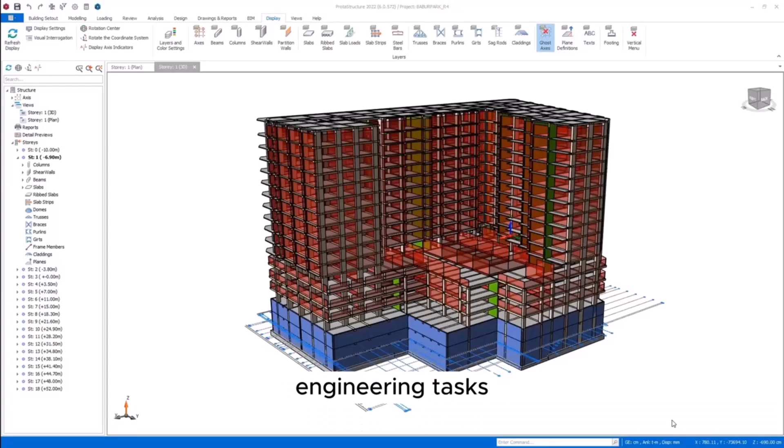Are you ready to discover Protastructure Suite? This comprehensive structural engineering software comes with 4 specialized modules, each crafted to efficiently optimize your engineering tasks. We are excited to introduce to you Protastructure. This innovative solution is designed to offer fast and accurate analysis and design for your building structures.

Imagine transforming the way you work with ProtaSteel, our groundbreaking tool for automated connection design and steel detailing. That's not all. ProtaDetail is a revolutionary structural drawing and detailing software, uniquely designed to automate the creation and organization of your structural concrete detail drawings. And all of this is achieved with just one click.

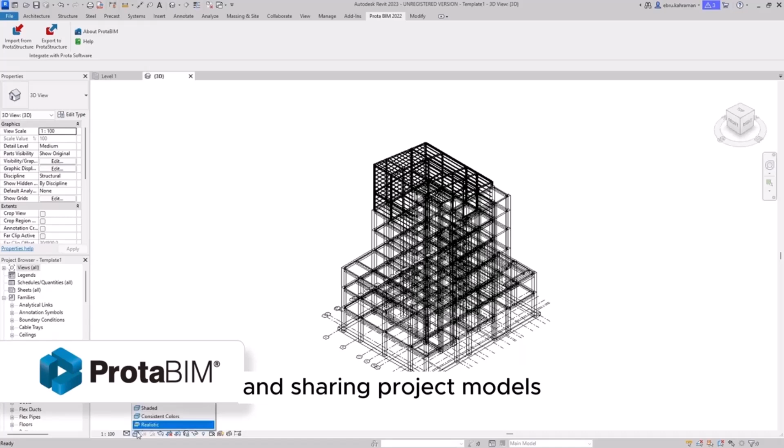And let's talk about collaboration. Our ProtaBIM feature is a game changer in coordinating and sharing project models. It's designed to enhance teamwork and ensure that everyone is on the same page. Minimizing project delivery time and increasing efficiency is central to our mission.

As a licensed user, you gain numerous benefits, including dedicated support from our Prota Knowledge Center. Our structural engineers are ready to assist you 24/7, ensuring you make the best use of the program.

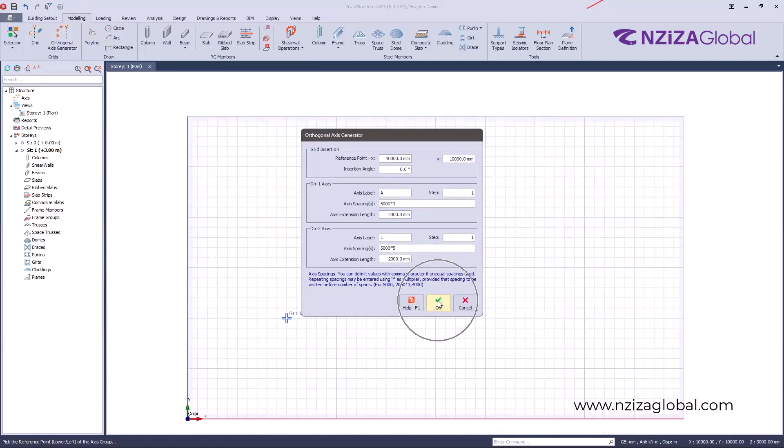We have also another way of generating grids automatically. Let's use like 5 here. If I click OK, now I will have a system of grids without creating grids one by one, which is a very fast way of doing things, thanks to Protastructure. After modeling grids, if you select a grid, you have different elements that can help you to modify a grid.

You can offset a grid. You can move a grid. You can see all these. You can stretch. It means you have a flexibility to model a grid as you wish. For instance, you can offset this grid. If I open the property, you have different methods that you can use to modify the grid.

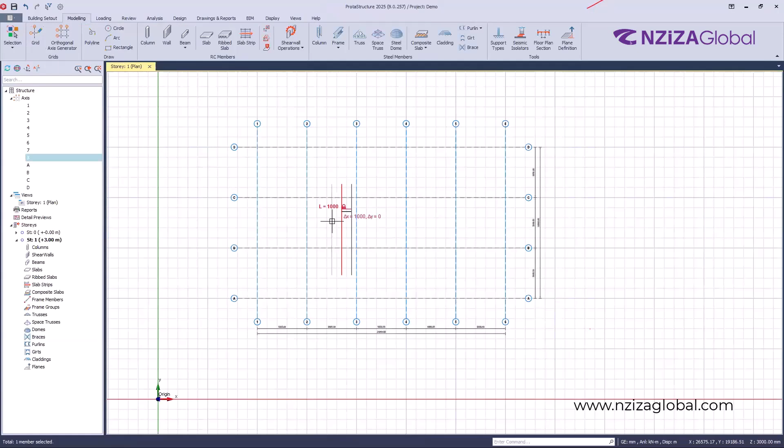You can, for instance, hide the bubbles. You can decide to hide the axis. So you see the difference, this axis is somehow hidden. You can stretch, for instance, like this. So you see that you have different flexibility in modifying grids. Let me offset another grid here. So you can offset grids as you wish.

Then let's move to the column. You can place columns in Protastructure. You have a property where you can define the sections of the column. If you are done, you can just drag and drop, then the column will be placed. As simple as that. Drag and drop, column will be placed. Everywhere you want, you can place columns in just a few seconds, like so.

So you can use this section manager, because by default I was creating a square column, but you have the flexibility to model all other different types of column. You can model a circular column, for instance. If I place, you see now I have a circular column. You can model even other types of column geometry. Protastructure gives you the flexibility to model different types, like this one. This is a cross shape. You can draw an L shape column and so on.

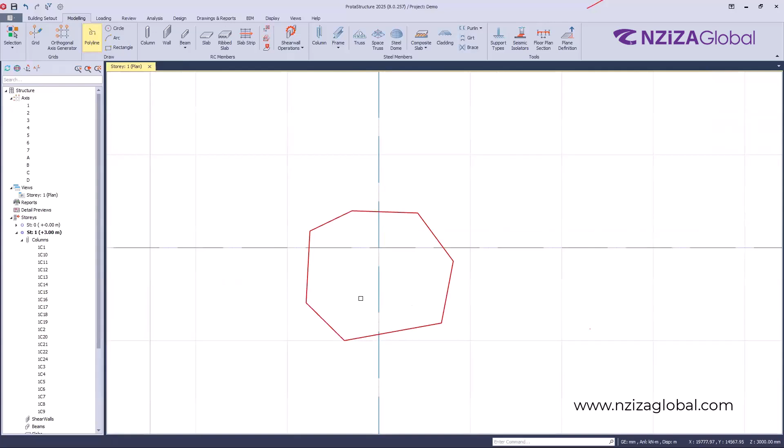You can also draw, for instance, any irregular shape. If I have something like this, you see it is an irregular shape, but if you want to create this as a column, it is also feasible in Protastructure. Select this and convert it into a column. If I place, now I have a column with an irregular shape. So when it comes to columns, you can place any kind of column as you wish in Protastructure.

So let's go to the wall, shear wall. If you have to place a shear wall, then you can use this command here. You can place a shear wall as you wish, for instance, like so. This is a wall. Between two intersections, you can place a wall as you wish, like this. Let's try to do the same here. If I click and try to offset this, I want to create another one here.

Okay, so instead of taking the wall from here, you can take a property of one of these walls, okay? And again, you can model walls as simple as that. So that's it. You can also, if you have already modeled a column, for instance, like this one, open the property again and do a modification.

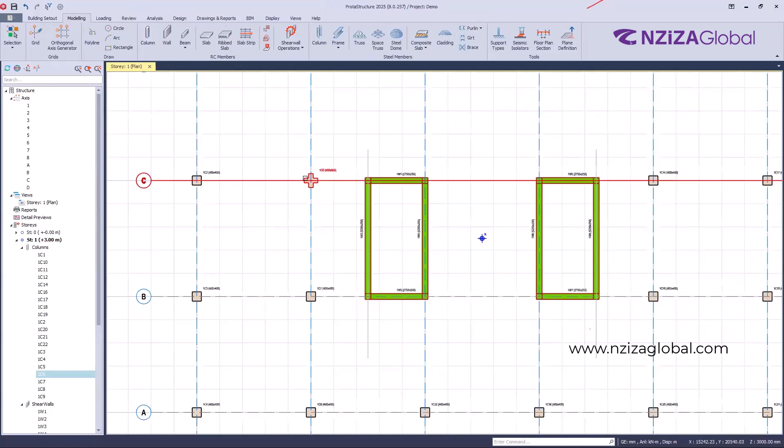Maybe change the section. If you click on update, you see now the columns which were square have been changed. You also have a flexible capability of matching properties. For instance, if I right click and go to match properties, I can select which property I want to match, click OK. Then I will select some of the columns like so. If you click on enter, they will directly take the properties from the selected one.

Okay, so you see how ProtaStructure gives flexibility when it comes to modeling either columns or walls.

So there is someone who is trying to write on the screen. Can you try to delete? Okay, thank you. So let's go on.

Let's see how we can model, let's say, a beam. It's a matter of taking the beam, then changing the sections of the beam as you wish.

So someone who is writing on the screen, can you please delete? Okay, so please don't write on the screen because it is somehow disturbing, okay? Thank you.

So it's a matter of filling in the size of the beam, and you can drag across and beams will be created as simple as that. You can create them one by one, span by span if you wish to, but this is the fastest way of modeling when it comes to beams. You can see what you have modeled so far.

You can also view what you are modeling in a 3D view. For instance, if I open the 3D view, you can see what we have modeled so far. You can see those columns which were changed. You can go back to the plan view if you wish to.

So let's continue modeling. Let's see a little bit on the slab. When it comes to slabs, ProtaStructure has the ability to model different kinds of slab. It may be a solid reinforced concrete slab, a ribbed slab, a waffle slab, or even a composite slab. ProtaStructure has the ability to model all those kinds of slabs. So for this case, let's go with the solid slab.

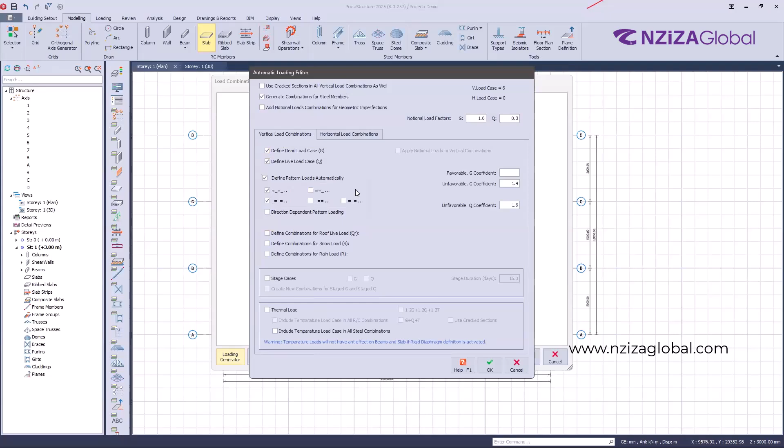To define this, we have stage cases, we have thermal cases. In horizontal, we have seismic, wind load, soil pressure, and so on. So it's up to you to define depending on what you want to use. I will select one of them. Then after selecting, the slab property will open. Then you can put the parameters that you wish: the type of slab that you want to use, the height, and so on.

And with a single click, all the slabs will be modeled. You can see in a 3D view what we have modeled, slabs as well. You can also model slabs one by one if you wish, but I'm showing you the quickest way of modeling.

You can decide to toggle so you can see the 3D view and the plan view at the same time, like this, if that's what you wish. You can reset again to have one view, depending on what you want to achieve.

When it comes to shear walls, you can also add openings in the shear walls. For instance, let's suppose that this shear wall must contain a door. If you select it, you have wall openings. Then you can add openings and define the measurements using these values here. Define the position of the openings as well as the size of the openings.

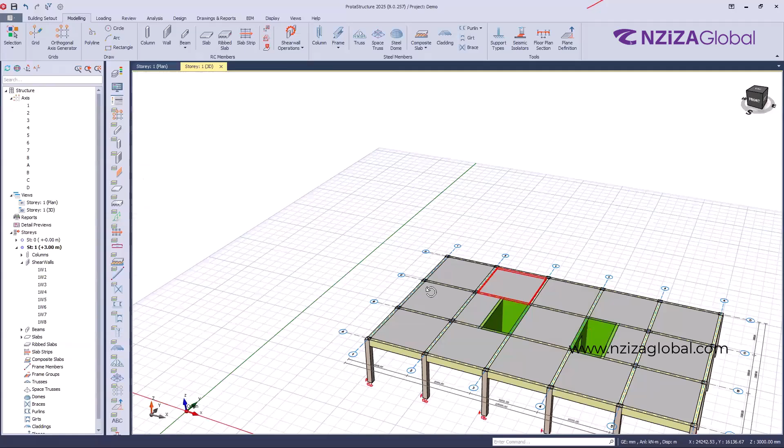And if I click on OK, you can see now how I have modeled an opening in a shear wall. Okay. So sometimes if you are working with a project, you see this slab is in my sight, I cannot see the shear wall. I can use these layers here and decide to turn off maybe the slab. They are not deleted, they are temporarily hidden. Okay. So because I want to work with this shear wall, I have temporarily hidden the slab. Okay. They are not deleted.

Then I will add another opening here, like so. Great. If I click OK, now you see you have openings. If you go to the plan view, here on the walls, you can see that I have 4 different walls. Okay, you have an option to select all of them and merge them to become one continuous wall. You can do the same as here. Merge vertical members. Now, if I select one of them, you see it is combined. Okay, so I will show the slab again. That's what we have modeled so far.

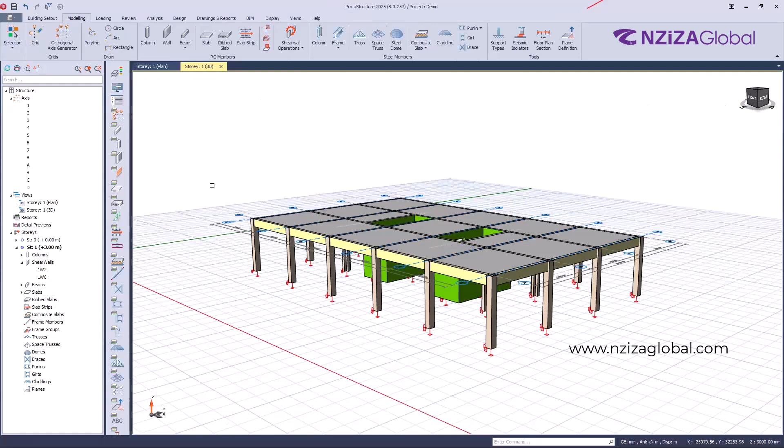You can decide to model slant beams, I mean slant columns, for instance. If I, for example, offset something like here, okay. If I model columns here, for the demonstration, I will tile my view so that you can see what I'm doing. See, we have those new columns here. I'm going to slant them. It's a matter of selecting, opening the properties. Using these tools, I can slant my columns.

You can see how the bottom side has been slanted. Okay. Repeat it on this side as well. Click on update. And then you see that you have also the capability to draw such kind of column. So you can see how ProtaStructure is flexible when it comes to modeling. Let me put also beams here. Okay, you can see that whatever I'm doing on the left side on the plan view, it is also being applied on the right side. Okay, so ProtaStructure gives you all these options.

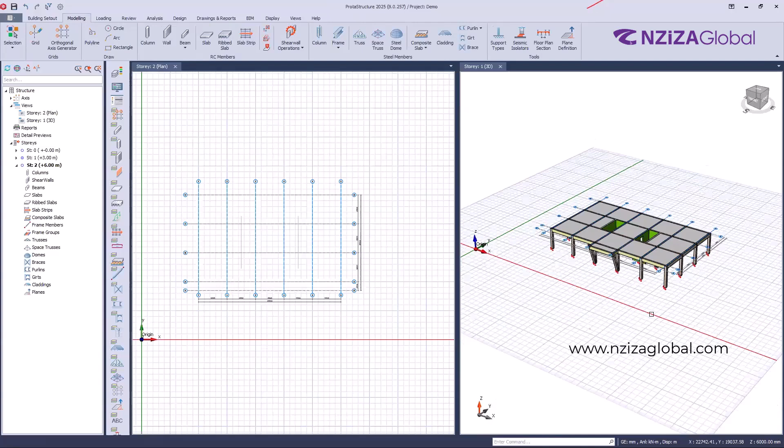Okay. So let's go and try to create another story, the upper story. So under stories, I can insert another story to make it 2. Click OK. Now on plan view, it is still empty because there are no members yet, in plan view or in 3D view, it is the same. So instead of starting modeling from scratch, you have an option that lets you copy elements from one story to another story. So I'm going to copy all the elements that we have modeled so far and paste them on the new story that we have created. To achieve that, I will use the generate stories command.

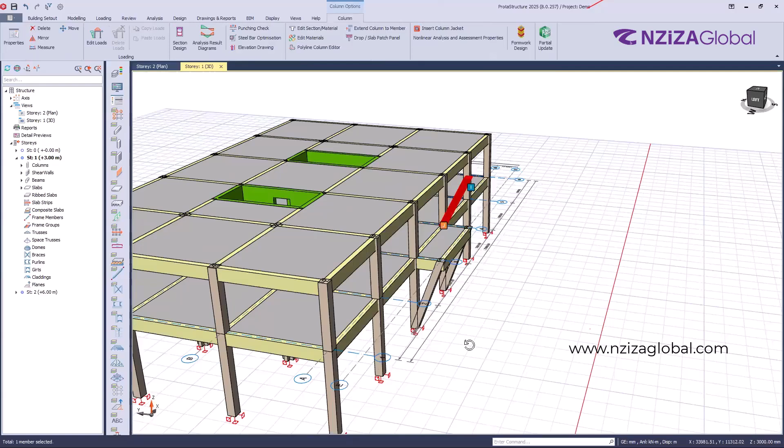Okay, you have to select where you want to copy elements from, where you want to paste them, and here you have the option to select which elements you want to copy and paste. Okay, so for my case, I will select all, then click OK. Take a look here in the 3D view. Now we have 2 stories which are similar. And even though you have copied elements from one story to another, you still have the flexibility to modify them. For instance, I can select some elements and delete them. If I delete them on the upper story, they will not be deleted on the lower story. So you still have the flexibility to do such modifications.

So in this floor, you have seen that you can model a solid slab like so. You can model also the flat slab. So let's try to model a flat slab on this. It means there will no longer be beams. So I'm going to select all the beams on the upper story and delete them. Instead of selecting beam by beam, there is always in ProtaStructure a faster way of doing things. So we have a filter command. I can use a filter, then decide that I want to select only beams. In this case, if I select everything like this, you can see that only beams are selected. Okay, then I can delete them.

Okay, now I'm sure that the beams have been deleted. So now I have flat slabs. Because we have flat slabs, we have to increase also the depth of the flat slab. Instead of doing it panel by panel, there is always a fast way of doing things. So if I right click, okay, let me do it maybe on a plan view, because you have the flexibility to do it in plan view or in 3D view.

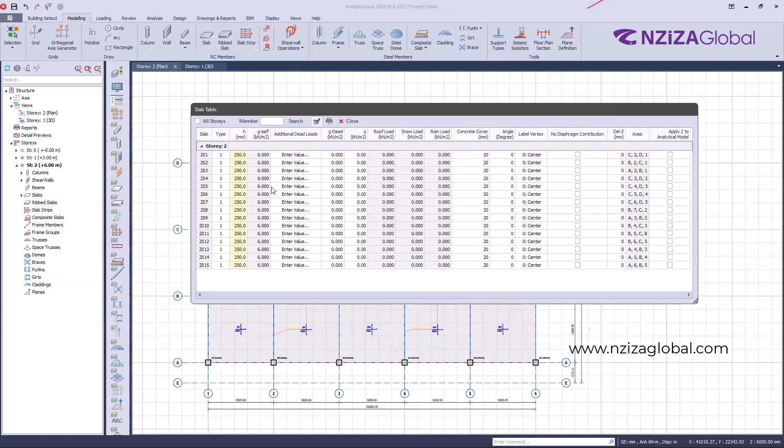If I right click, I have member table. I can go all the way to the slab table. In this case, I'm sure that I have a list of all the slabs in story 2. You can see by default we had 150, but I can select this and maybe put 250. We are working in millimeter. Take a look. If I click on OK, the 150 have been changed to 250. And then if I try to zoom, see all the slabs have been updated. Okay, so instead of modifying slabs one by one, you can do such a thing here.

Talking on slabs, you can also model a cantilever slab. As an example, under the types here, you have type 12. Type 12 is a cantilever slab. So if I select cantilever, I can define the length of cantilever, let's say 1.5. Then take one point and another one. You have to decide the orientation of the cantilever slab, upward direction. Now you see I have a cantilever slab here.

So if I do the same here, you see how the software is intelligent enough to connect automatically these two corners here. Let's do all the way around the building, creating cantilever slabs from here and here. You see that all the corners have been well joined. If I open the 3D view, you see you have a cantilever slab all around the building.

Okay, so because we are modeling this flat slab, we have to define the drop for the columns. So I can do it on plan view, using the filter command again. This time I will be selecting columns. So select all the columns. Now you see only columns have been selected. If I right click, then I will have a drop slab patch panel. So I'm going to add some drop to the columns.

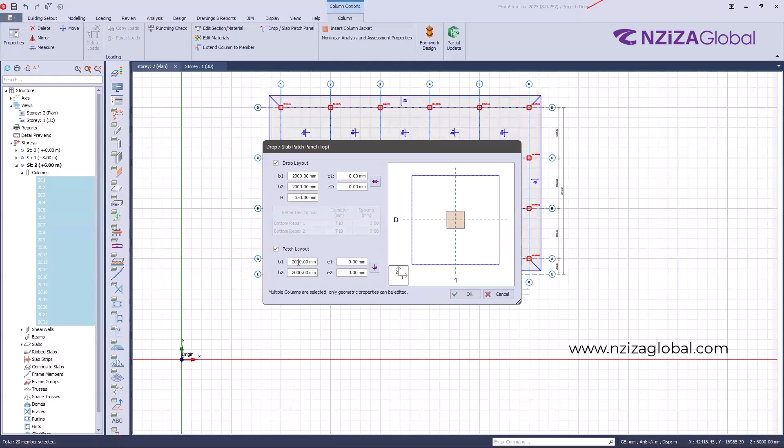Just put the values here, patch layout as well, as you wish, depending on the result that you want to achieve. Okay, so if I click on OK, you see all the columns now have the drop panel. If I go in a 3D view, that's how it is looking. Okay, so we have modeled the flat slab as well.

So let's try to go to the upper story. I will create another story. That story now will be 3. I have created another empty story. So you are already familiar with generating. We are going to generate members again to the third story. Let me bring the one from story 1 to story 3. Then I will copy only shear walls and columns, and beams. Click OK. Then we have copied the bottom side. I will delete these slant members. I don't need them for now.

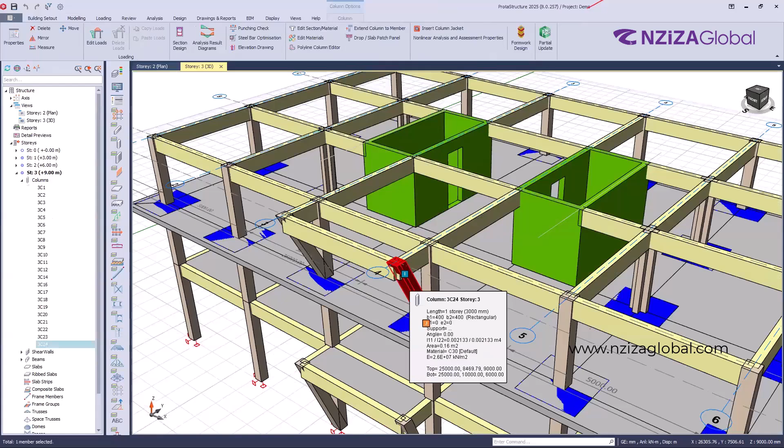So on this part, what I want to model are other types of slabs that are supported by ProtaStructure. Ribbed slab, you can model ribbed slab as well. So that's what we are going to do. Open the ribbed slab here. Under the ribbed slab, you have to define the size of the ribbed beams. For instance, here, let's say 375. You can make it hollow or block, depending on what you want to achieve. So if I come and place, now you see I have a ribbed slab. Let me do it all the way here. If I go to the 3D view, now you have modeled ribbed slabs.

So let's try to model also the waffle slab, because they are also supported. Under type, it's a matter of changing and going to grid. Waffle slab is referred to as grid in ProtaStructure. So then I will again model the slabs. If I go to the 3D view, you see I have also modeled the waffle slab.

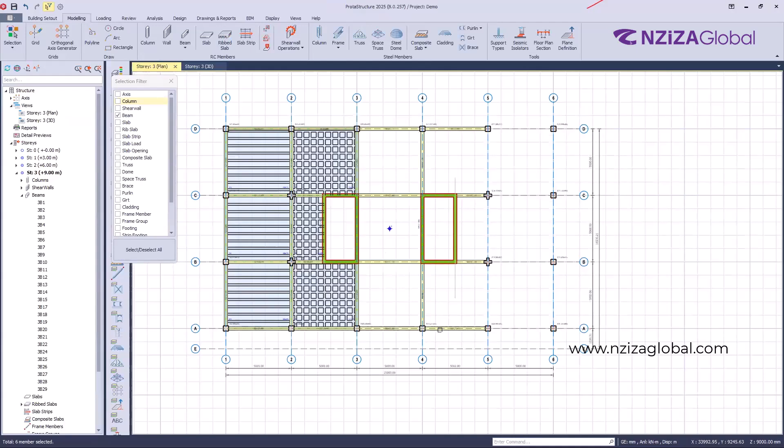You can also model the composite slab. Let's try it on this side. So I'm going to select all the beams here. These ones, delete, and then let's delete all these beams. I'm deleting these beams because these beams were concrete beams, and I want to create a composite slab.

So I will need to create steel framing. Under the steel part, under the frame, you can model the primary composite beam. It's a matter of coming here. Under the property, you can select. We have different property sections, depending on what you want to achieve. So you can select one of them.

Click OK. Okay, then you have to model. I'm going to just model the beams all the way here. Those are the primary ones. Okay, like so. You can go and model the secondary ones under the frame also. You see, you have secondary composite beam.

However, I will not use this command because if I use this one, I will be needing to model one by one, which is time consuming. Remember, in ProtaStructure, you have always the easiest way of doing things. So I'm going to use the frame. So it's a matter of coming, select a given property here, the section. Okay. Now under this property, I have to define the quantities.

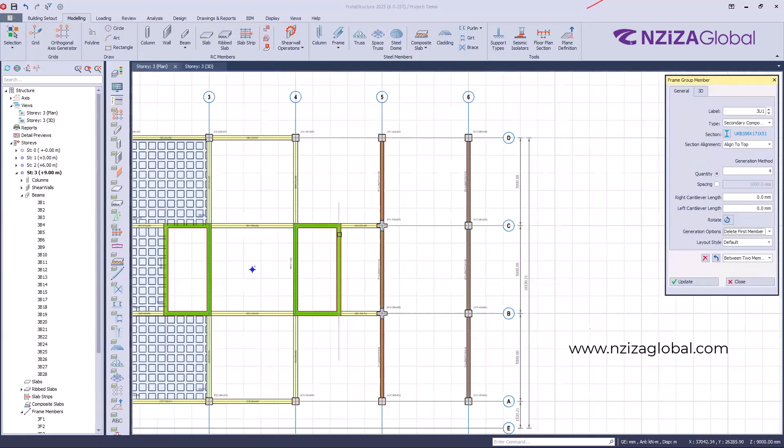Let me use like 4. And then under generation option, I will delete the first member. Okay. So if I come select the first one, select the second one, the secondary member will be automatically modeled. I can do the same here. Then on the last part here, I don't want to delete the first member here, so I will have to change and use normal one. If I click these two, then they will be placed.

Okay. So the remaining part, if I open in the 3D view for you to see what we have modeled, I have modeled the primary beams, the secondary ones. Then we have to model the concrete slab. Okay. We have to put the composite slab here. Okay. You have 2 options. You can use one that you wish. I will use this first one. I will model slab all the way here. Then the property will open.

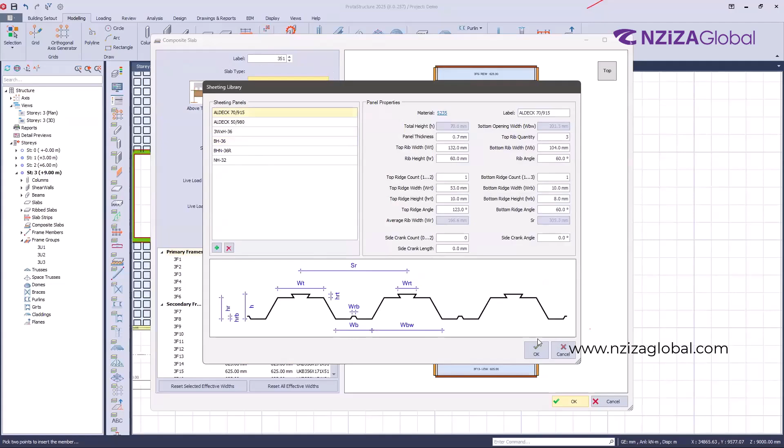So you have to deal with these properties to change the slab here. Do you want the slab to be above the flange? You can see on the figure here, the slab is above, or you want it to be level to the primary beams. It's up to you. You can always come here under the deck. You can change the sheeting deck, the type of the sheeting that you want to use. Okay. You can also change the thickness.

You can apply some loads, either the live load, you can apply the dead loads, okay, as you wish. If everything is okay, if you click on OK, now we'll have a composite one, like so, okay. So we have covered all the slab types. So let's go to the upper part and try to create a roofing. So I will also create another story up, empty story, like so.

So I will again generate members. So I will go to generate members from this story all the way up. I will only copy, let's say, columns. Click OK. Close. Okay. So we have copied all the columns. We want to model some roof. Okay. So let me delete this.

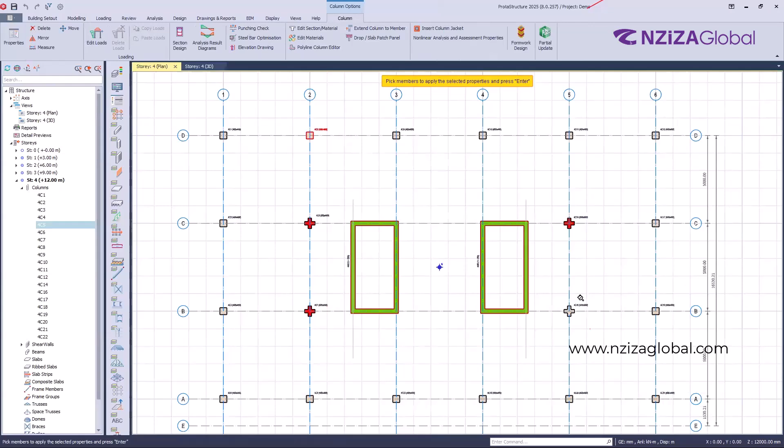Do it on plan view so that it will be much clearer. Again, I will use the match property. Remember the match property that I have used before. I want all these columns to be squares. If I click enter, they will have the same property. Let me delete these columns here. Good. Okay, so what I'm going to do, I'm going to try to elevate, because you have also a possibility to elevate a given column.

Okay, so I will select all these columns here, rotate and select all these columns. See, they are all selected. If I go to the properties, okay, then you can use this delta Z to add an offset. So I want to add an offset at the top side. Let's say 2000, for instance. If I click OK on the top side, close, you see now these columns have been elongated. Okay, they don't have the same height as before.

So let's try to model the truss, for instance. Here under truss, we have a truss. If I select truss, it's a matter of selecting the starting point, the ending point. I will have a truss dialog box. You can choose from the different truss types and the patterns that you wish. You can use these parameters here to change the geometry of this truss.

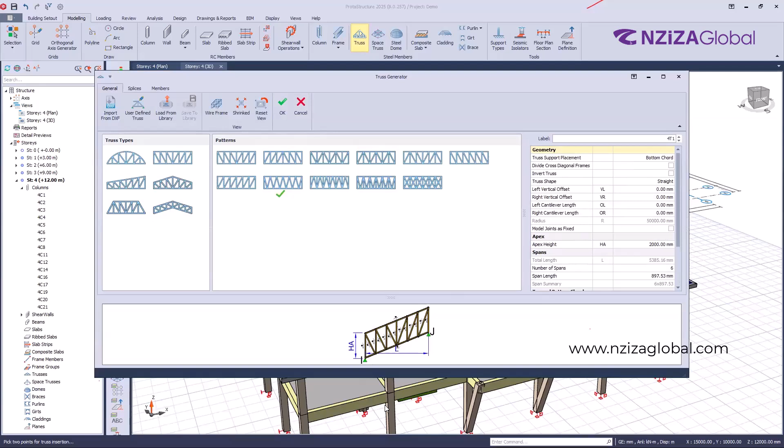Okay. For instance, you see that the supports are on the bottom chord. Okay. You can maybe say you wanted them to be on the top chord, like so. See that it has changed. You can use all these parameters to change your truss. You can apply splices if you wish. You can go to the member type where I want to define the sections of the member.

So if everything is okay, if I click on OK, now you can see how my truss has been modeled. It is somehow a little bit weird. So I will go back to the property. Then you put 1 meter here instead of 2 meters to be much more realistic. Good. So you can copy even a truss from one end to another. So if I select copy, you can copy from this node, for instance, all the way to the remaining nodes. See how they have.

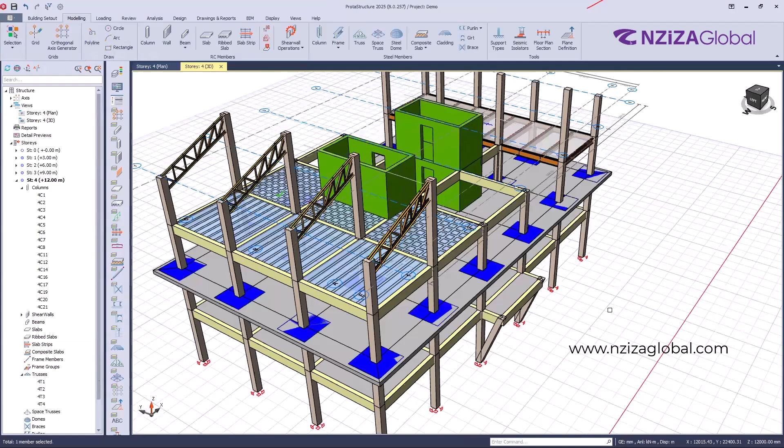Can do the same here. See, I have modeled the left side. If I want to model the right side, I no longer need to go back to the settings. As long as I take the command, click OK, the software remembers the latest option that I had, so I can continue placing. Okay. So place, copy from here all the way here. Okay.

So you can see, it's up to you. You can model in the plan view, you can model in the 3D view. All are acceptable. So let me try to put some other steel members, like for instance, purlins.

Okay, if I select one truss and another one, then I will have a dialog box where I can again use these properties to set these purlins. Do you want to use the sag rods? You can use this to make changes, or you can click none to remove the sag rods. Click OK, then purlins will be placed. Okay, I can do the same here. Click OK, purlins will be placed.

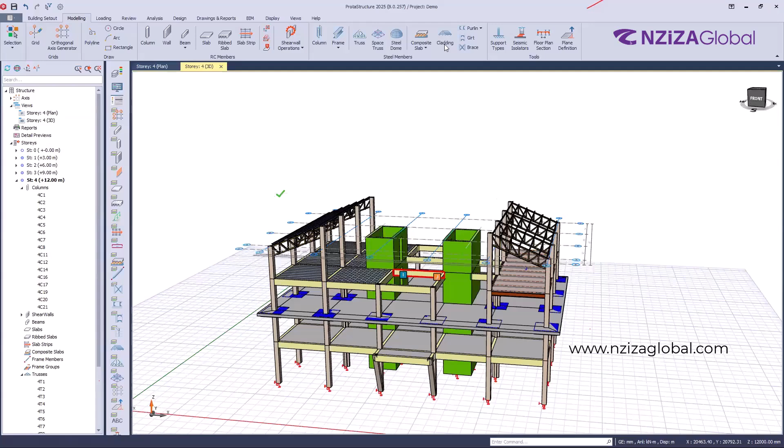Good. So you can also even add cladding. For instance, if you select cladding, select the purlins, cladding will be automatically created for you. You see now I have claddings. You can even apply the loads on claddings. Okay, if you go under loads, you have also flexibility to add loads. Okay. On the left side, let's also add the cladding here.

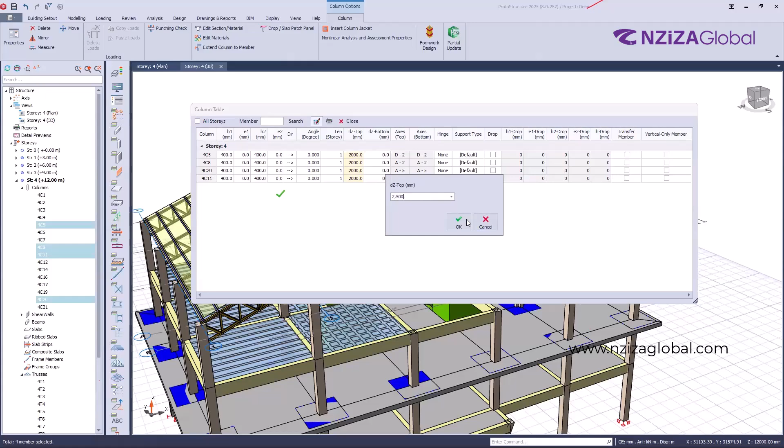Then that's good. So for the middle part, let's try to do something very interesting. It's a new feature in ProtaStructure 2025, the space truss. Let's try to use it. For that, I will try to elevate again these 4 columns. Let me try to select. Go to properties. Under delta Z, I will increase again by 500. Okay. Yes, you see they are a little bit longer. I want my space truss to sit on those columns.

So let me do it on plan view. It will be much easier for me. So I'm going to create a space truss. It's a very new feature in this software. So select truss, then select where I want to put my space truss, then it will be automatically generated. Okay, so it will be up to me to do some modification depending on the shape I want to achieve.

For instance, let me use this one. If I click on generate, you see how it has been generated. It's a matter of changing this top surface, the bottom surface. You can use this icon here to change the sections of your truss. You can go under loading where you can apply some loading. You have self-weight, live load, and so on. Okay, like so.

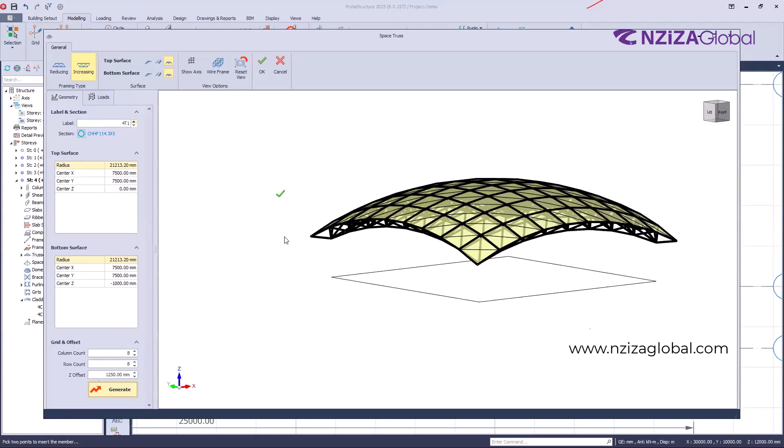Under geometry, because I have raised the columns, let me try to put some offset here. Yes, it will be much better. If I click on OK, just wait a bit to load, then to create the space truss. If I go to the 3D view, you see how my space truss has been created. Okay, so you see what you have modeled in just a few minutes. So you have a lot of tools here that you can use. You have a very flexible way of modeling any kind of shape depending on the building that you have.

Okay. So after modeling, let's see about loading. You can do the loading part. You can customize some walls, masonry walls that you want to use in your project. You can apply different materials. Is it bricks? Is it plaster? Is it tiles that you want to add? Okay. If the material you want is not listed, you can also add it using edit material. You can add the material that you want.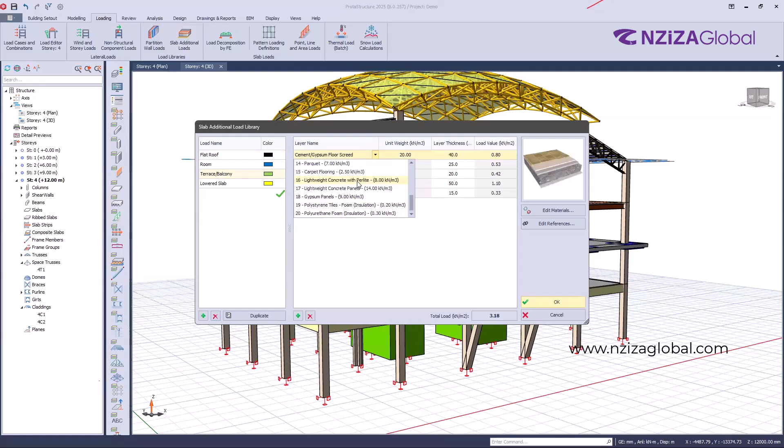You can do the same for the slab. If you have additional dead loads that you want to add on the slab, do you want to add gypsum on the slab? Do you have a cement grout? Is it tiles and so on? So if you don't have the material here, you can always come here and create your own depending on the project. So after creating this, the remaining part is to assign the material.

Let's suppose this beam here. If I go to story 1, this beam here is supporting a masonry wall. I can select it, go to edit, then I can add a masonry wall. I will have to define which wall, okay? I will have to define the height and so on. If I click here, click OK.

Now we see the red color here that I have. It is indicating that there is a masonry wall sitting on the beam. If I go to the plan view, you see now the beam has become red because it means it has a masonry wall. The good thing about Prota is that it is a very user-friendly software.

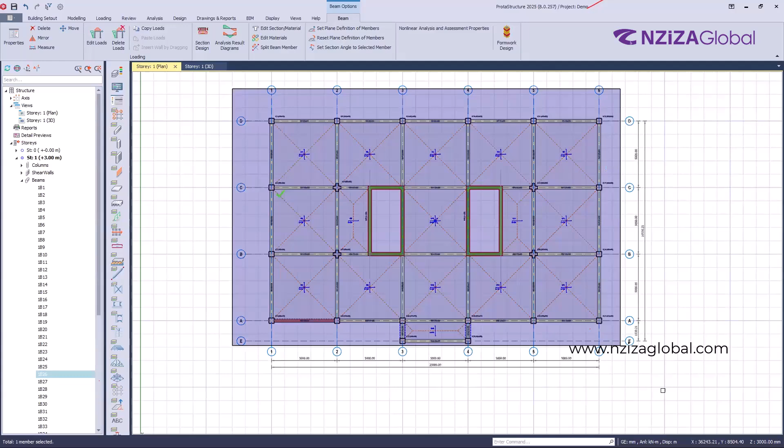So let's suppose all the beams have the same wall. Instead of assigning beam by beam, you can just simply click on copy. You can copy these loads, and then you can select all the beams. Use Ctrl V on your keyboard to paste. And now if I go in the 3D view, you see all the beams have those masonry walls.

Okay. If I go back to that masonry, there is an option to add openings. If you want to add, maybe there are some windows, or even some windows and doors, for instance. You have the flexibility to add those openings as you wish. Click OK, update, then OK. Now you see that the masonry wall also has openings.

You can do the same for the slab. If the slab has, let's say, a masonry wall, you can also go to the edit load. So you see all these kinds of loading. You can add a point, you can add a uniform, you can add an area, and so on. So they are also feasible.

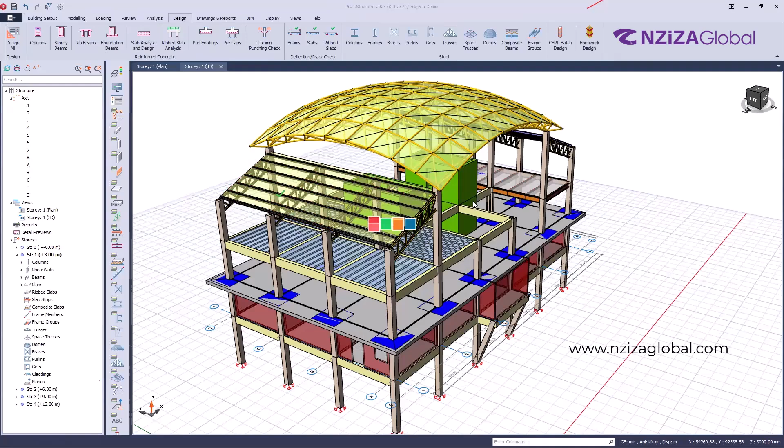So after loading your structure, the next step would be to do the analysis and design. Because of the short time that we have for the demo, I will open a new project which has been analyzed and designed. It is the same project, but which has been analyzed and also designed. You can see it is similar to the one that we have modeled, but we have analyzed it.

You can see members are green, so it means if you see on the legend, they are okay, they are passing. So all members have been analyzed and designed. Even the trusses, you can see all are green here. It means they are passing, they are okay.

Going to the analysis, you always have the analytical model. Suppose I have clicked on the analysis part, we have analyzed. You can always come under the analytical model, where you can investigate the loadings, the shear, the forces acting on the structure. Then you go to the design, where you can design columns. For instance, if I open the columns here, all the columns have been designed. For demonstration, if I open one of these, you see it has been designed.

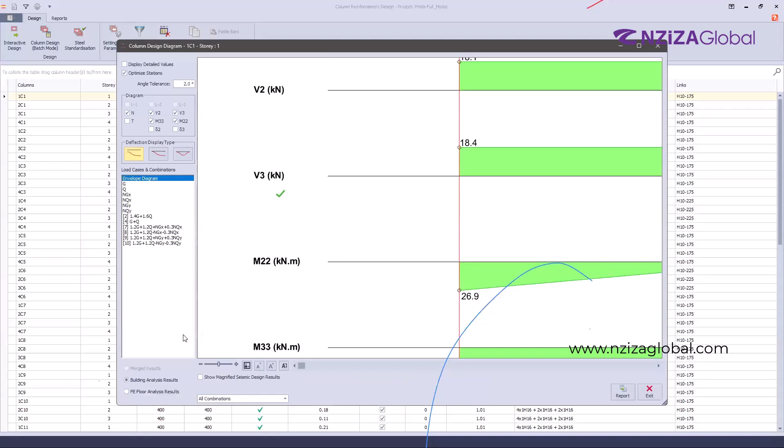We have all the load combinations that we have applied. We have the reinforcement here. You can open the diagrams if you wish to view. You can see all the results. You can create a report for this column if that's what you wish by clicking on this. You see you have a report. You can save it as a PDF or Microsoft Word.

It's up to you. You can even view the drawing, how it will look after detailing. You see we have all the reinforcement in the columns. We have all the sections all the way up. That's how all the slabs have been designed. We also have the shear wall, remember we had the shear wall. If I click on rebar layout, you see the details of how the reinforcement has been added. Again, you can create a report and so on as you wish.

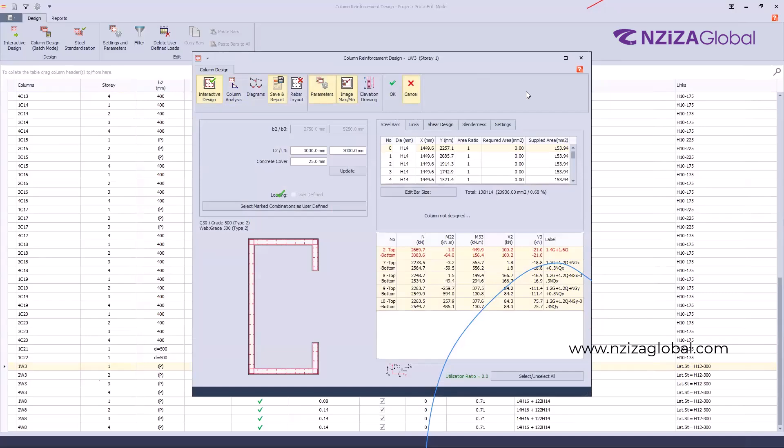You can also design the beams, the story beams. If I open one of the beams, for instance, for you to have a view, they have been designed here. You can see the detailed drawings as well for the beams. I have a beam, we have the section here, and so on.

We haven't designed the foundation yet, but we have slab analysis and design. Those are the analysis and design of the slab. You can also create the report if you wish. We have designed the ribbed slab. Remember the ribbed slab we had here. So you have to define the ribbed slab. Click on design.

Wait, there are no members here. We have footings. We haven't created footings so far. So let's go to the footing. Before going to the footing, let's look at the steel part, because we also have trusses.

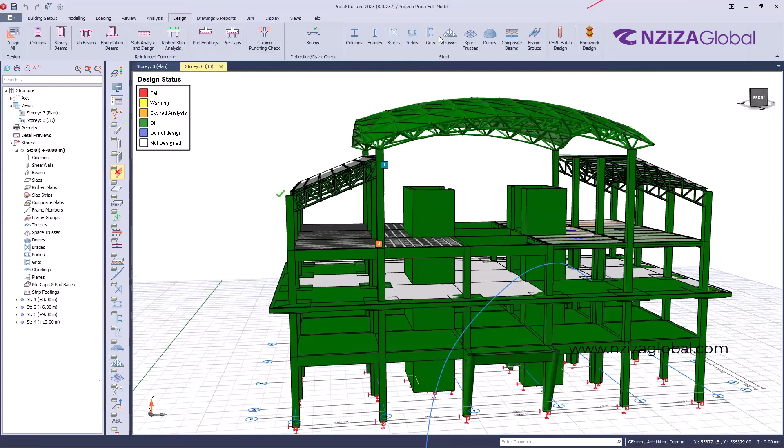So if you click, for instance, on truss design, everything is passing because they have been designed, but you can double click to investigate more. You see the truss that we have created, all the information is here. If you want to redesign, you can use this, you can change the section, you can create a report, and so on, as we have seen.

Even for the space truss, the new one that we have created. Okay, so you can design the part here. So the last thing here I want to show you on the design part, you can design the formwork in ProtaStructure. Okay, ProtaStructure can perform formwork design.

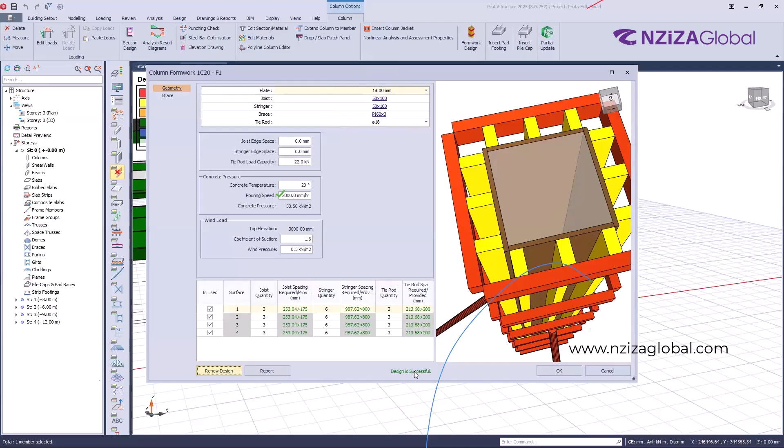If I select a column, see, I can design the formwork. Under the geometry, you can define the spaces here. Okay, if I click on renew the design, now you can see the design is successful. You can do it for the columns, you can do it for the beam, you can do it for the slab as well. You can design all these formworks, okay, good.

So let's move to the foundation part. So if I go to story 0, select any given column, I can insert a pad footing, I can insert piles depending on what I want to achieve. Okay, if I insert a pad footing, as it has been designed here, I can use these features to adjust if that's what I want to achieve. I can see different parameters here, the soil parameters that I'm using, and so on.

You can go to the rebars where you can change. If I click on a 3D view, you can see the reinforcement that they have created. Okay. Do you want to use the top bars? If, for instance, I remove these kinds of bars, see, it is being updated. If everything is okay, you can generate a report. You see, again, you can save it as PDF or Microsoft Word. If I click on OK, now the pad footing will be created.

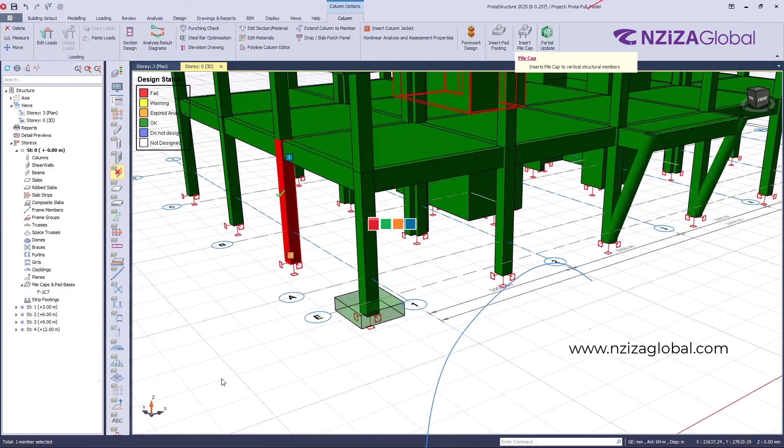So you can also create piles. Again, under the pile cap, you can use all this information to adjust the piles. If everything is okay, the design is successful here. If the rebars are okay here, you can again click on OK, then the pile will be created. Okay, you can also design the mat foundation.

For instance, for this area here, I'm trying to model a, let's suppose here, this will be the perimeter of the slab. Can put the slab, let's say it will be 300, for instance, 400, any value, change to be closed. So if I create a slab here at the bottom, okay, so I can also design this mat foundation.

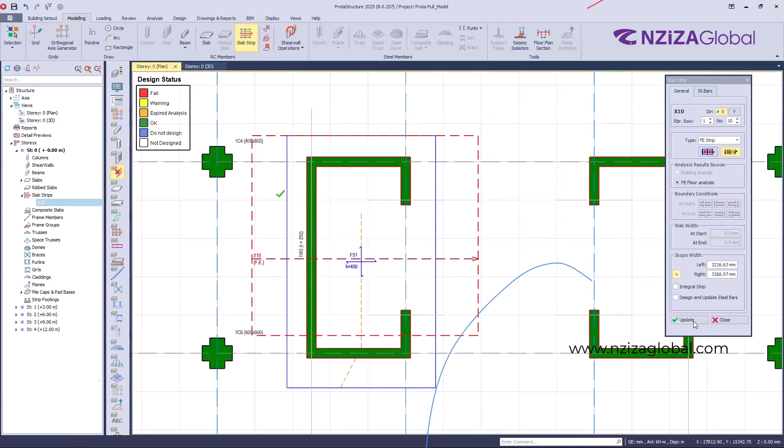I will be using the strip again, and the strip, I will use the slab strip, finite element. Then you have to define the strip, okay? Click OK, the strip will be defined. You have to do the intervals. As long as I update, you see the boundaries are being updated and so on. So update. You can create even the one in the Y direction. Again, update. Update this boundary as well, and so on.

Okay. So after creating this boundary strip, you can do the strip design, but it is asking me to do the reanalysis. So I will not go through analyzing again, but that will be the way of designing a mat foundation. Okay, so that's it about the design. So if you have designed everything, then it will be time for the reporting and drawings.

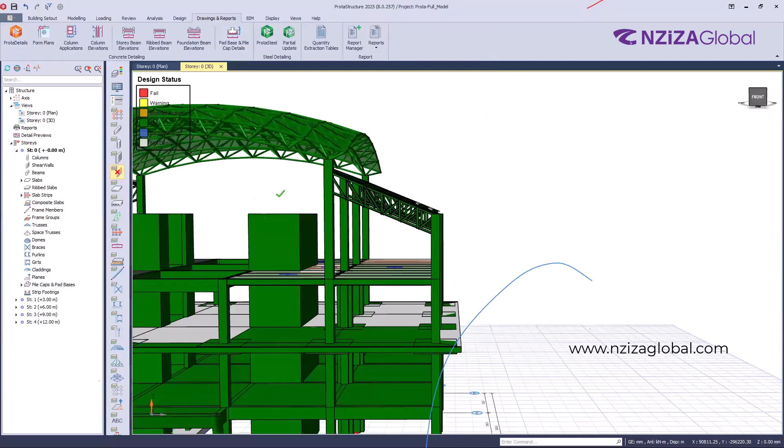You will be using ProtaDetails to produce details of the reinforced concrete. We'll be using ProtaSteel to define the connections of the steel as well as the detailing of the steel. Before we go there, there are two important reports that ProtaStructure provides. After doing all this work as structural engineers, the next work will be doing quantities while producing the BOQs. So imagine doing the quantification of all this building. It will be time consuming.

But in ProtaStructure, we have very unique features that will let you know all the quantities of your project when it comes to concrete and formworks. So if I go to quantity extraction, I can extract all the concrete that I have. If I click on calculate, I will have a table showing all the quantities in cubic meters of the concrete. Okay, you can see the foundation part, and you have different stories.

Now you see here at the top we have the total quantity. You can click on report to have all the details. Column 1, for instance, having this diameter, section, area, length, then it will give you the volume. Then it will do the summation. It will give you all the quantities for columns, for beams, any reinforced concrete member that you have.

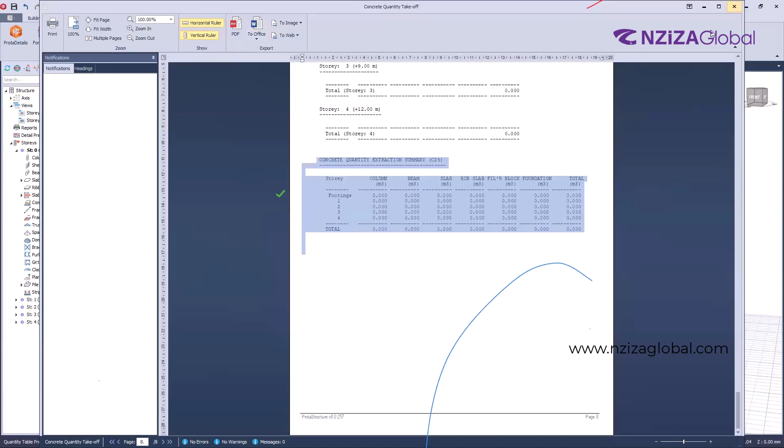Then here at the bottom, we will have a table showing all the quantities. So again, we can save it as a PDF or Word. You can also extract the quantity for the formwork. Very, very useful. Again, if I click on report to have a detailed report, you will have formwork quantity takeoff for all your project, and you can save it again. That's very, very useful, thanks to ProtaStructure.

So let's go to the launch of ProtaDetails so that we can see how we can create detailings. Maybe before I go to ProtaDetails, there is a question from Amsaru. Sorry if I pronounce it wrong. He said 3 questions. One, can we assign surcharge and pressures on retaining walls as triangular distribution? I think that is in ProtaDetails. No, even here it is also available.

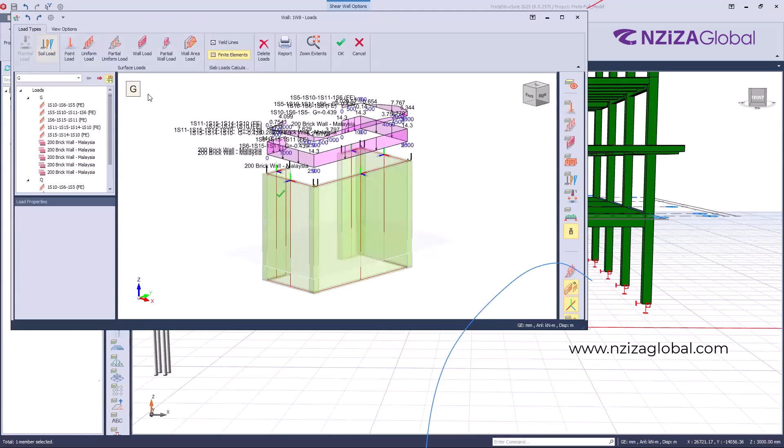For instance, if I go to this shear wall, suppose it is supporting a wall. If I go to edit load, then we have wall area load here. So if you apply this wall area load, it will be applied to the surface of the shear wall. You can see even here on the graph, it is a triangular load. There is also another way. I will not click on OK because it will invalidate my analysis, but that's how we can achieve it. Even in ProtaDetails, we'll see how you can do that.

So when it is soil applying laterally to the shear wall, it's a matter of going to edit load. Then you have this wall area load. Any other question? His second question was, how is structural system classification considered? How is? Can you come again? How is structural system classification considered?

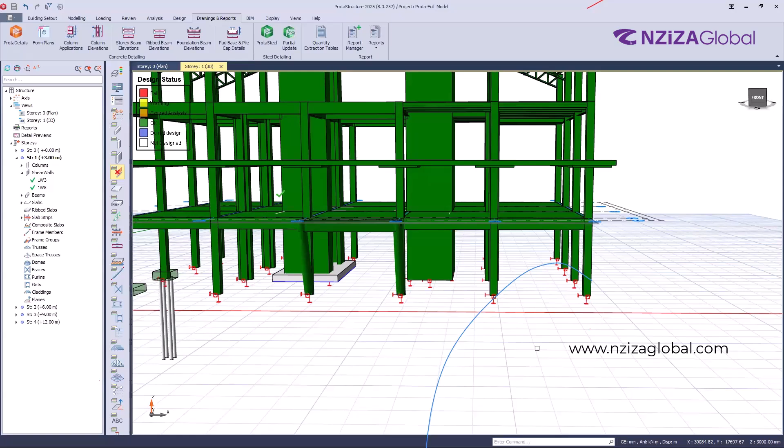I'm not getting the question very well. Maybe he will give more information. Yeah, he can unmute and provide the clarification of what exactly he needed to ask. Okay. Amsaru, are you there? He is not around, maybe? No, he is. He is even unmuted. Can you speak loudly, please? We can't hear you. Maybe you can use typing in the chat box, because we can't hear your voice.

His third question was, how can we go through building system category? Building system category is considered when you are dealing with earthquake analysis under the building analysis here. You see, if I go to the settings under the earthquake, mine was deactivated. That's why we didn't see it. But if you open one of these, click OK, you'll have seismic parameters. Depending on the code that you have selected, you will have different categories of building. Let me double check the one I have selected first. Eurocode.

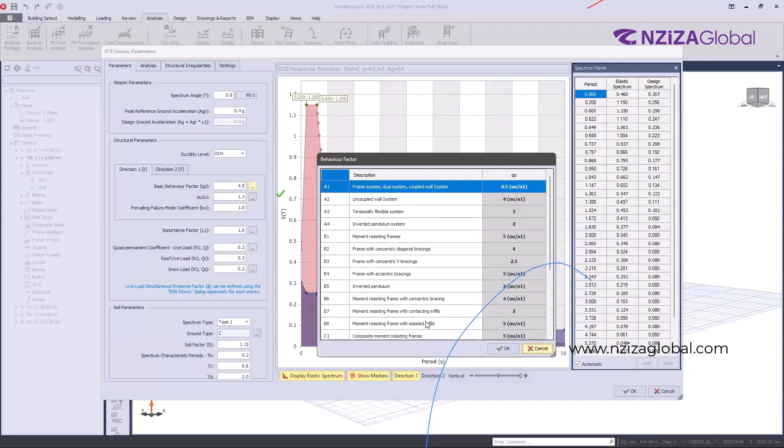So under the settings here, you can see the ductility level. You have medium, low, and so on. You have all these features. If you click on the behavior, you'll see different categories of buildings: multi-story, beam systems, steel frame, depending on the type of the building. Then you assign them here under the properties. If you click on OK, they will be applied. Then later on, you go to the analysis and run the analysis.

So I will not click on OK because it will invalidate my analysis. So I'm going to go back the way it was, but that's where you can set all those kinds of categories for the buildings. I hope he's answered. This question is the same as Mama's, and I think both of them are answered. The chat box is still open. Tadeste asked how ProtaStructure exports to ArchiCAD software. It's just to save a file which is opened by ArchiCAD. We'll go on that later. We can proceed to ProtaDetails.

Okay, so the one who is writing on the screen, can you delete the one that you have drawn?

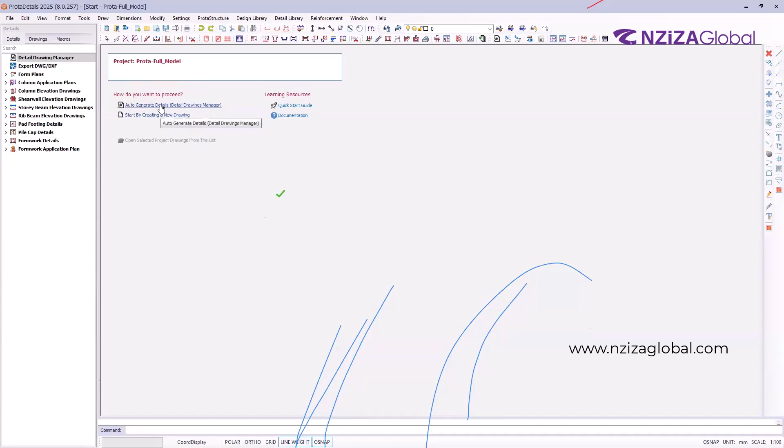So proceeding to ProtaDetails, it is under drawing and reports, under ProtaDetails. For my case, I have launched ProtaDetails. I have opened it in the background. That's how it opens. So there are two ways of generating drawings. You can start by creating a new drawing, which means creating an empty drawing. Then you as a designer choose which element you want to detail. So that's one. There is another, auto-generate detail. That's the one I'm going to use. It means the software will automatically generate all the details for you.

There's a couple of settings that you have to go through here first. I will not go through all of this. I will just click on draw. If I click here, then you will have to wait. The software is generating all the drawings for your project, meaning the columns, all the beams and so on. You see in the background here, some of the drawings have started to be drawn. It will take time depending on the size of the project and also the capacity of your computer. So it is generating beams.

Let's wait a bit, still loading. Okay. So here in ProtaDetails, it is a CAD platform, if I can say. You will be able to automatically generate all the drawings from ProtaStructure, from the project that you have designed. But we have also other design tools which you can use here in

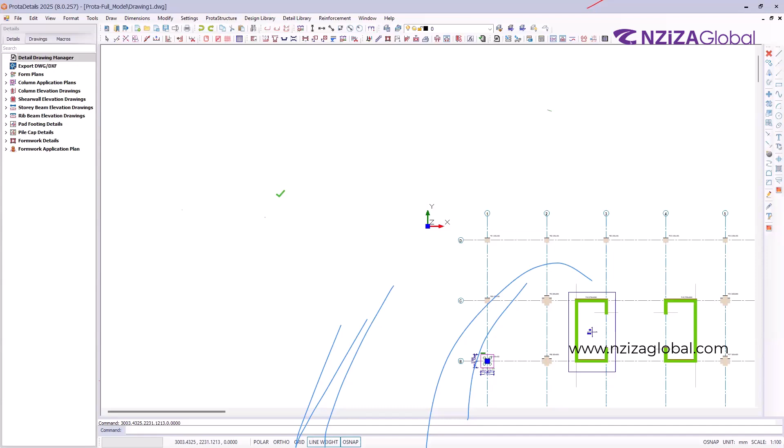Yeah, I'm opening the detailing. It is still loading, so it is taking a bit of time because of the space trusses that we have created, I think. So, okay, it is done. So let's go on. You can see I have a bunch of drawings here. There are many drawings. That's why it took a little bit of time.

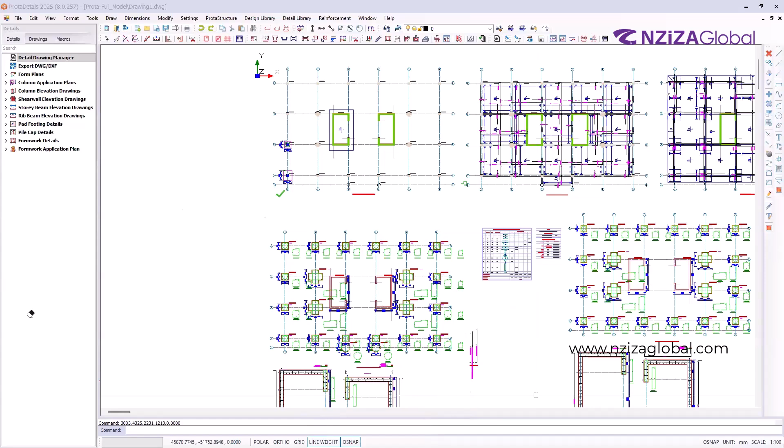If I try to zoom here, this is a foundation level. We have only the foundation, remember the pile cap that we created. So let me try first to delete all these drawings. Okay, so I will stop sharing for a bit. Let me see if I can delete. No. Okay, good. So I was deleting those elements. So let's proceed.

So I was explaining this is supposed to be a foundation level. So we have only the pile cap that we created and the pad footing. You see they even have dimensions. We have the first story. Remember we had a solid slab with reinforcement. You can see we have reinforcement in both directions. We have another one where we had a flat slab. We have also reinforcements along the strip. We have the one for the ribbed slab and composite slab.

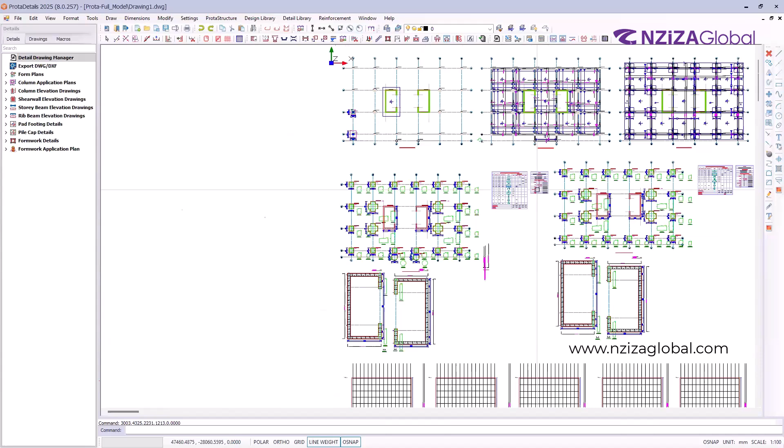Then we have the column application, where it is showing all the columns with reinforcement on the grids. We have a column application quantity takeoff. This is a very great feature of ProtaDetails. As long as it has created all the drawings here, it creates also a quantity takeoff in tabular form, with the reinforcement size, the quantity, the length, and even the schedule. So it will be very useful when it comes to quantity takeoff, even on the site for the steel bender. He will have an overview of how it is.

We have those shear walls with all the reinforcement you can see. Remember we created an opening. Good. We have the column elevations. See all the details for the column elevations. These are those columns that were slanted, the circular ones. We have beams here, all the way down with the sections, reinforcements, and so on.

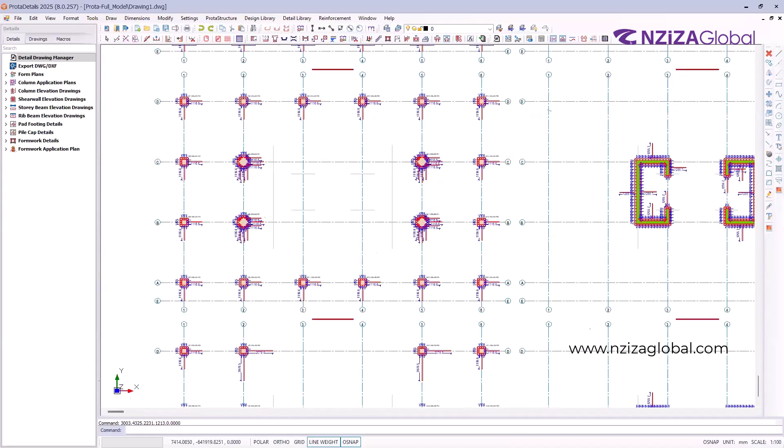We have the formwork. You remember we designed the formwork for some columns. You have the formwork as well as the table for quantity. All these in red are the formworks for all the members that we have created. There are a lot. That's it. You see how the software has created all the drawings here with a single click. So this is the easiest way.

A good thing here is that these are not just lines like in other detailing software. These drawings are interactive. For instance, if I select, let's say, this column, I can right click and create quantities only for this column that I have selected. Now you see I have a quantity table for only the column that I have selected. So all these are not just lines with different colors, they are interactive.

So if I select this line, it is not a line, it is a rebar, it is a reinforcement. I have a property table. I can modify any properties here. For instance, you see it is diameter 16. Under the quantity table, we had also 16 diameter. So under the property, I'm going to change from 16 to 20. I'm putting a diameter of 20.

So if I put 20 here, it is going slow because we have a lot of drawings. But what I want to mention is, as long as you change this number here, the 20, it will be applicable in the quantity table as well as on the other drawings.

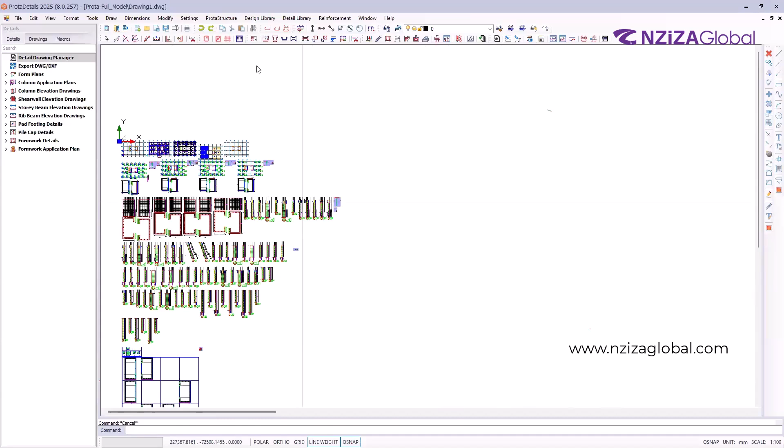So you can put all of this on a sheet, because under the properties, you see we have insert to sheet. So you can put it on the sheet where you even have a title block and so on. For instance, if I open one of the sheets here, you see this is a sheet with the title block here. So you can put all these on a sheet if that's what you wish.

It is also feasible. Then talking about other design libraries, you can design the cantilever retaining wall, a stairwell, a retrofitting, a swimming pool, and so on. So that's it when it comes to ProtaDetails, because I see the time is running. So we conclude here.

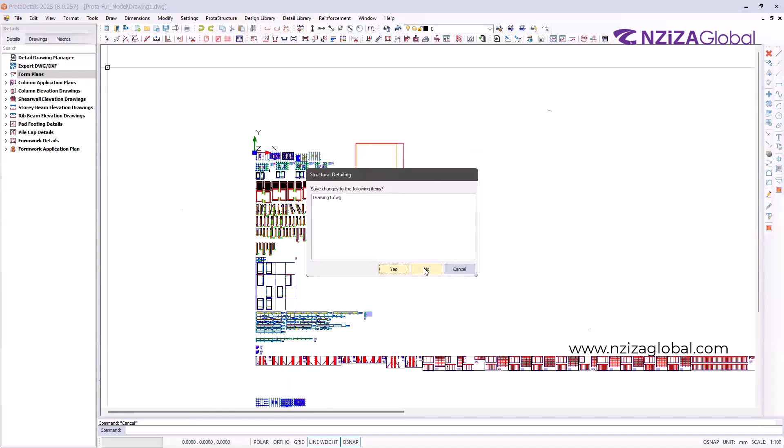But before I conclude, let me try to open a given project, any project that has been done in ProtaDetails, so that you can see the end result if you have done the adjustments. So this is a sample of one of the projects that I'm taking randomly. So you can see we have a sheet.

I think I can end here because the time is running. So maybe I will answer the remaining questions if Alexander helps, then we will conclude the demonstration. Yes. Thank you very much for handling that.

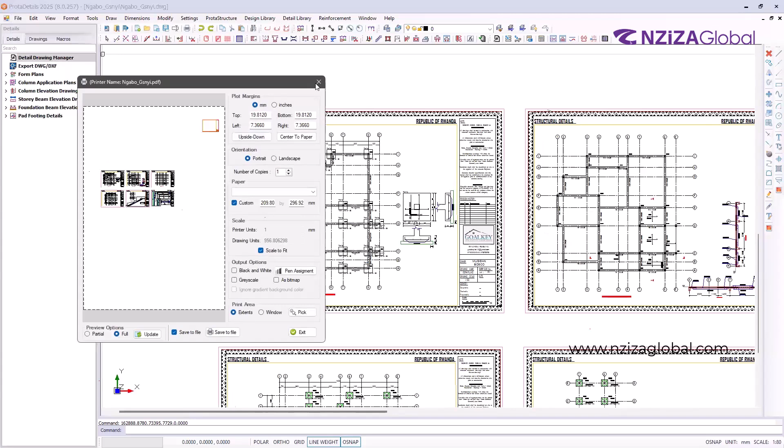For instance, these have been exported. You can see these are the PDF documents. This is a PDF document of those drawings that we were seeing. This is a PDF that has been exported. It is the same as this one. So that's about exporting drawings to PDF.

But here you can also create reports. Because when we were in ProtaStructure, the details we saw were individual. We had the column report, we had a beam report and so on. So here you can combine all those reports to make one PDF. It is done under this report manager, where you see all the different reports that we have. You can combine them as one. Then if you click on view, you can save them as PDF or as a Word document. So that's about exporting to PDF.

When it comes to the physical model like this, you can export it to ArchiCAD, Revit, or any other software. For instance, this is a Revit software that I have now. It's not ProtaStructure. If I open an empty file, you see that we have a ProtaBIM button here at the top. If I open this, you can import from ProtaStructure or export to ProtaStructure.

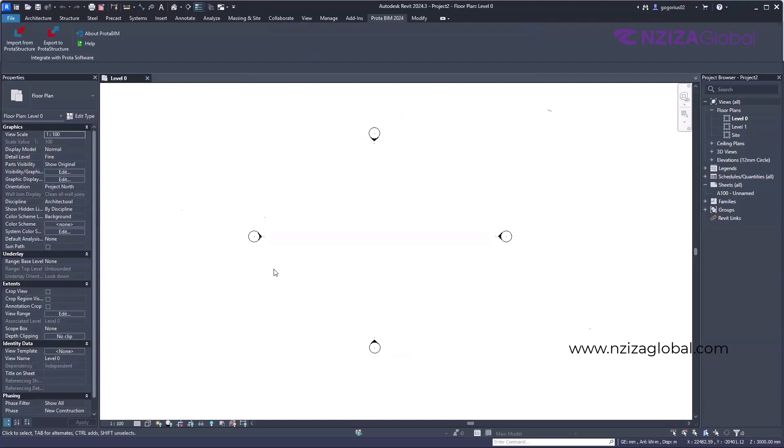Another way, you can just use the IFC. So for instance, if I go back to Protastructure here, under the BIM tab, you can export as IFC. So if you export as IFC, you'll be able to open this project. So after exporting, for instance, if I go to export, I'm exporting this. You see where it has been exported. Then you can open your other software, maybe Revit or other software.

It's a matter of knowing where the file is located, this one. If I click on open, it will load. It will load, then they will be uploaded. So let me re-export this again. Export full IFC. In the meantime, I can even open this. Okay, so go back to Revit.

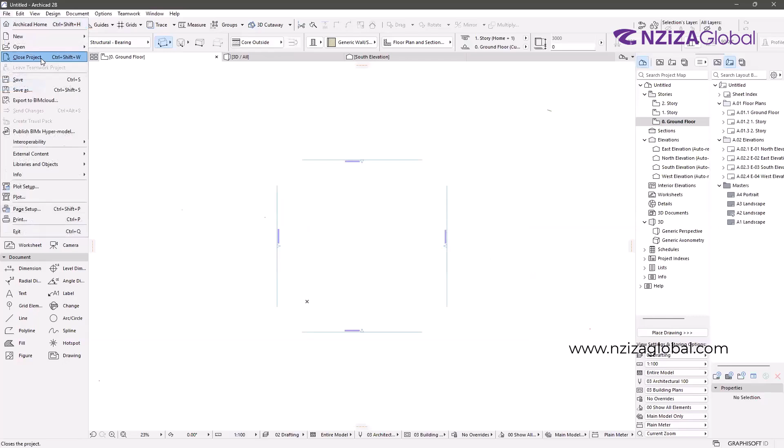So let me change the folder to be sure, let me put it on, let's say, desktop, for instance. Demo, save, export. So demo IFC. Then I will go to ArchiCAD. Then file, open. Then I will search desktop, find where the file is. So I will change the format to IFC. Then I will see the file, then open. Okay, so it will take time to load.

So when it comes to ArchiCAD, you can export from. There are some errors here. I don't know why. So let's wait a bit. When it comes to ArchiCAD, it's a matter of using the IFC file only. They are telling me there are some errors. I don't know why. But when it comes to Revit, you can see we have this ProtaBIM, where we have the import from Protastructure and the export to Protastructure.

Because you see, I'm in Revit, but if I use one of these commands, you see this dialog box which is appearing here is the one we are using in Protastructure. Because when we are opening a new project in Protastructure, this box that we have, with project code and whatever, is almost similar to the one we have here, where you have to create a project. So you see they are automatically connected because it is Revit, but for ArchiCAD, it is somehow different.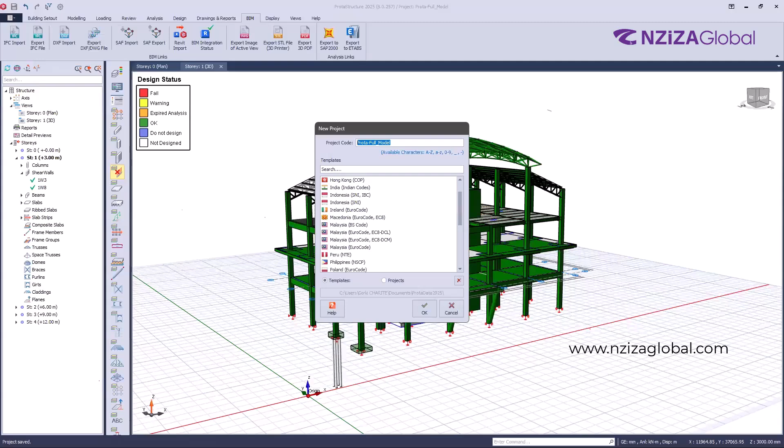You can see here I'm on Revit. You have a Revit family and Protastructure family. Okay, so you have to map Revit family and Protastructure family. Okay, but it is taking too much time. So maybe there are some errors. I don't know why. Can we start by answering other questions, Alexander, while I'm trying to figure out the problem of this ArchiCAD file?

Okay, Taodros asked, is the toolbar the same with other softwares? If not, what makes this different from others? You mean the toolbars of what? Of Protastructure or of ProtaDetails? Can he unmute and clarify? Hello, everyone. I'm Charite Gorki from Ethiopia. I want to ask about the toolbar of Protastructure and other softwares like Revit and AutoCAD. What makes it different? Is that the same or not? So the toolbars you are mentioning, is it related to these tabs here? You mean the tabs and the toolbars here compared with those from Revit? Yes, of course. And the modify toolbar we use in AutoCAD and Revit and so on.

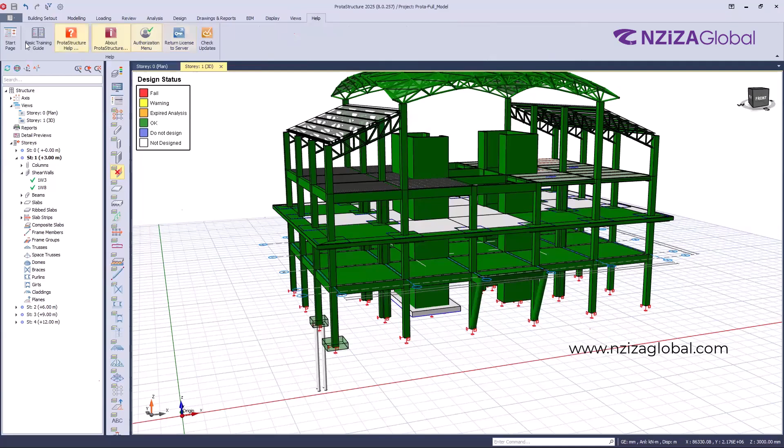And you remember when we were on the start page, I mentioned that here we have some links. These are resources. For instance, if you click on one of them, let's say get started, it will open a browser and then it will load, see, and then it will direct you to the Protasoftware website where you will have some references of the project and the software as a whole. Okay, so that's how I can answer your question.

Additionally, what I can add is that every software is unique in its way. You just have to see what benefits you. In Protastructure, coming straight to toolbar, tools, you might find a column here, and in another software you will find a column, but there are additional benefits for the tools in each software separately.

For example, you were asking about AutoCAD. AutoCAD is just a detailing tool. It's exactly like ProtaDetails, even though ProtaDetails is specifically designed for structural detailing, and it is automated compared to AutoCAD using another software, because AutoCAD has no structural software inbuilt, which is different here because ProtaDetails is directly connected to Protastructure.

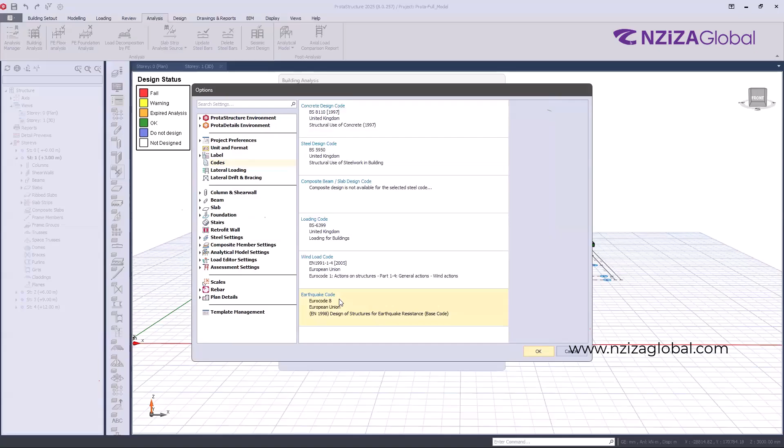For instance, before running the analysis, there are some settings that you have to go through. For instance, when you activate the wind load and the earthquake code, let's use the Eurocode, the one you said you are familiar with. If you activate these, you see now here I have seismic parameters, which I will use to specify the parameters of the seismic, and I have wind load where we go through defining the wind parameters.

So under the seismic parameters I have mentioned, depending on the project you are dealing with, you have to set all this information. All this information, depending on the type of the soil, the structure parameters that you have, the seismic parameters that you have, will be needed in analyzing those parameters you are saying. Okay, so that's first.

When you go to the modeling options here, you see where you have to specify the degrees of freedom of your structure, where you were talking about whether it performs the torsion. So you have to specify all of these settings before going to the analysis. Is your project torsion permitted? Is it permitted in X and Y only, and torsion prevented? All of this, you have to define before going to the analysis.

After defining all this, when it comes to seismic, because ProtaStructure is very, very powerful in seismic design, you also have to define some stiffness of your sections before going to the analysis. If the stiffness is defined, the degrees of freedom have been defined, all the seismic parameters have been defined, and we have other settings related to the slabs and whatever, that's when we move to the analysis part. Under the analysis part, the software will analyze all those parameters: the torsion, the loading distribution, the sway and whatever.

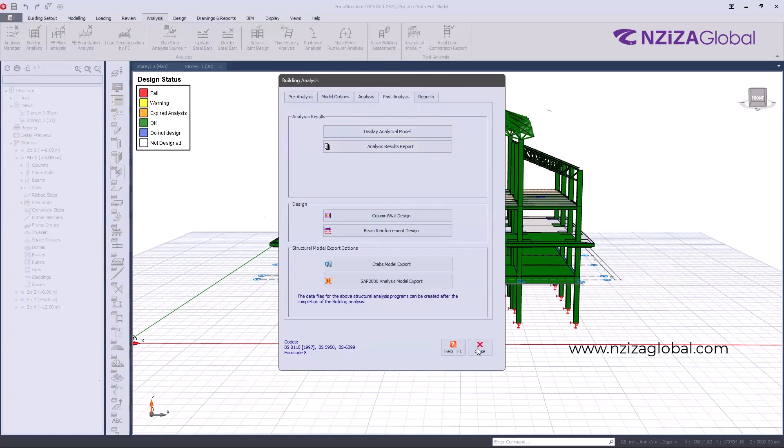So let me try to open a report to see if it is available. And let me double check to see if it is the post analysis. I'm going to try. Okay, let me see. So you see on this report, the post analysis report, it gives you all the reports related to those you were asking about.

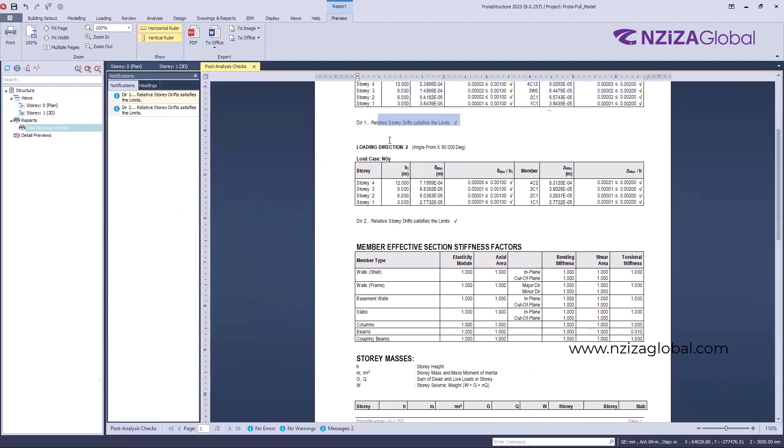Do we have to check the story drift? It will give you all the information here, the height of the story and whatever. It will perform some checks, and then it will give you the conclusion. So they don't have a drift here. It will do all these calculations, the story masses, depending on your project, the earthquake dynamic inertia forces, you see, all are here. So in short, ProtaStructure does all those checks that you have mentioned. The only reason you didn't see them is because we skipped the analysis part.

So when you join one of our trainings, we will have all the full information related to the analysis part, and we will cover all those parameters. So that's how it is.

Okay, thank you. You're welcome. Amsaru, are you answered? Yes, I got the answers from the engineers. I got the answers. Yes.

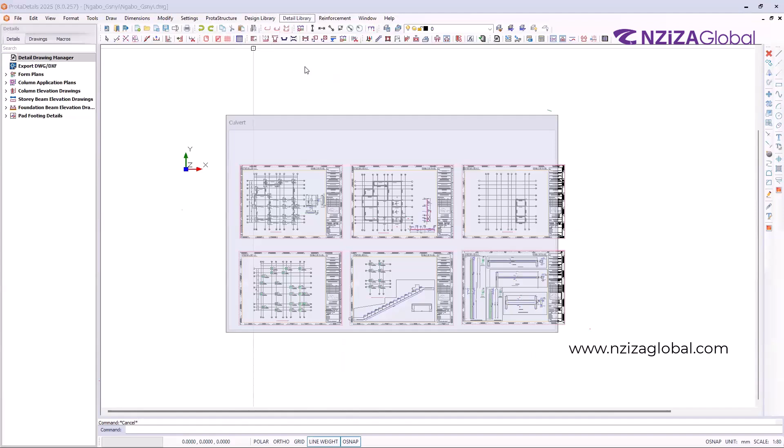It only details culverts. When you go to the ProtaDetail modules, we have a design library and a detail library. Under the design library, you will be able to see all the elements that ProtaDetail can design. But under the detail library is where the culvert is located. It only gives you detailing. So it means you have already designed it.

You only want the details, instead of going to detailing software and starting drawing manually. You can come here and fill in all these parameters, then the software will give you the details. So these are the details, but not the design. That's how it is. Excellent.

Would you mind giving me a chance for questions? Abadi, which question do you have? Would you like to unmute and ask? Maybe. I have something. Yes, your voice loudly, please.

Okay, thank you. How can we transfer towards the pads, and how can we select first the loads to design or to analyze? We should have to transfer first toward these pads. So how can we transfer the loads from roof toward the pads?

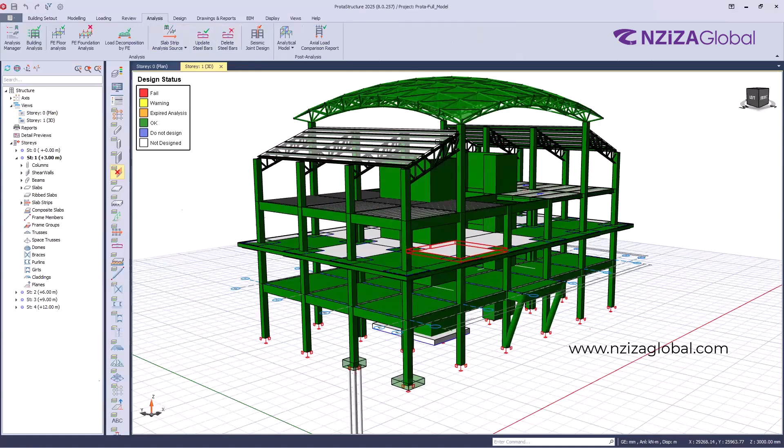Thank you for your question. You are asking how to transfer loads from the superstructure all the way down. So all of that is under the analysis part, because when we are analyzing, the loads are being transferred from the top going down. But you can also use this load decomposition by finite elements. It will decompose all the loads all the way going down.

And again, if you open the building analysis after setting all the settings that I have mentioned so far, and click on building analysis, all the loads will be transferred from the top going down. When reaching the pad foundation, you have to design the pad after doing the analysis, because after doing the analysis, that's when the loads have been transferred.

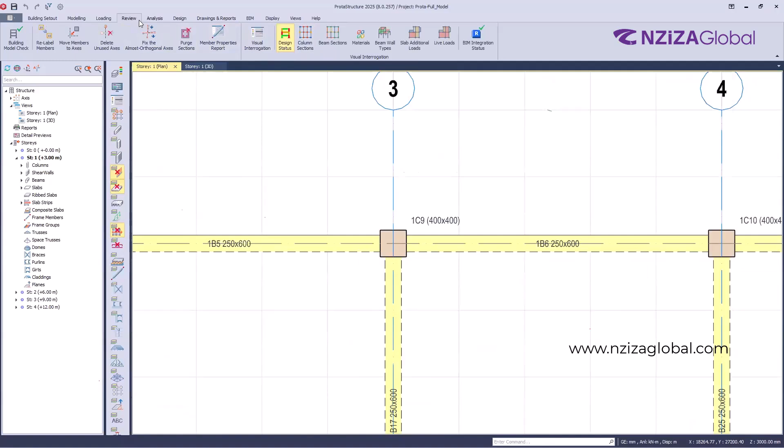So if I open a plan view, let me remove this color legend so that it will be easier. Let me hide the slab. I'm hiding some of these layers, so I have only columns. If you go to the Review tab, under Visual Interrogation, you see the column display. Open it and you can activate one of the load types, let's say actual load.

You can define a load combination. Let's use one of these and click OK. Now these are the total loads reaching this column. In the upper part I had 100 and something; in the lower part I have 300 and something. So the loads have been lowered all the way down. This is achieved only after doing the analysis.

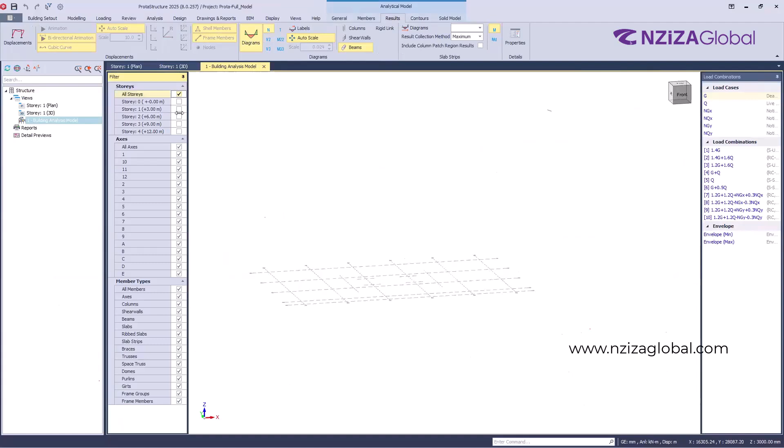Another thing, if I open the analytical model here, it will give you an overview. This is the analytical model of our building. Under this analytical model, let's activate the diagram so that you can see the diagrams. I will show only some of the stories. Now I have activated only story one so that you don't have too much information.

Here we have different loads depending on which load combination you want to access. If we click on one of these, I have activated the diagram. Let's start with the member. If I activate the frame, you see how the load has been distributed from the slab to the beam. You can even open the label to see how they have been transferred in kilonewton per meter on the beam.

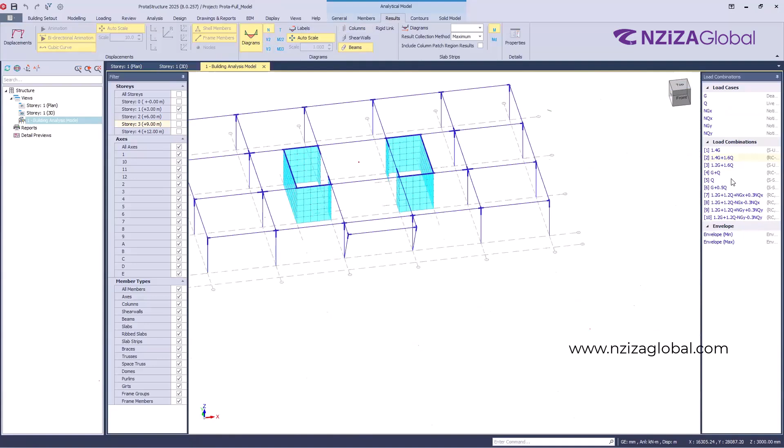From here you can see that all the load has been transferred, then from the beam to the column. You can see the shear, the moment, everything in diagrams, depending on the load combination you have chosen. So this is to show you how to confirm that all the loads have been distributed from the top to the foundation. It is done after doing the analysis.

Yeah, I don't know if you are answered. I have one question, please. Okay. Do you hear me? Yes, I hear you. Okay.

Can we export the Etabs files to Prota files with the details already assigned in Etabs? Can they be transferred to Prota, and can we check the design through Prota? And the second question I have: here in our country, we have an authority to check our designs. They usually check using the Eurocodes. The calculation will be attached with Eurocodes, and the details will be from the Eurocodes. Can Prota deliver these documents for the statistical papers?

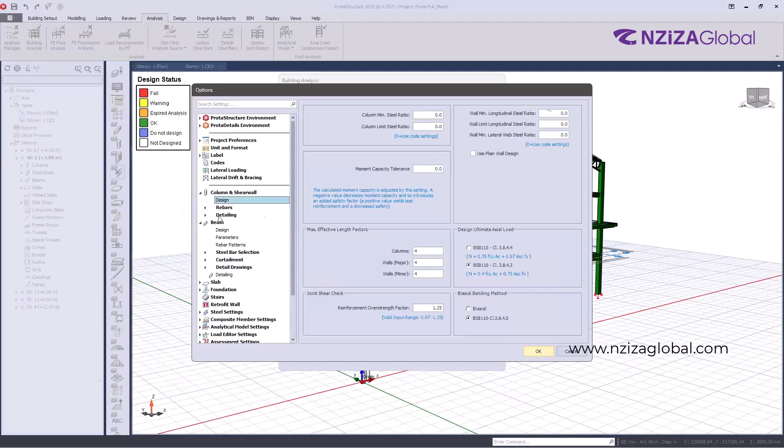And other annexes. When it comes to steel design, we also have the Eurocode. For loading, you also have Eurocode. So you can use Eurocode in ProtaStructure. And coming to the detailing, if you want to respect the code that you have chosen, it is also possible. For instance, under the detailing, let me take column detailing as an example. Under the settings, you have to first do some modification before producing drawings.

So I'm going to the column, then to the detailing. Here I have different settings related to the detailing. Starting from the general tab, you set the kicker length, the starter bar length factor, and so on. You can change these values manually. This will not affect the design, only the detailing. For instance, this bar length is 0, and if you read this note in blue, it tells you that with a 0 value, it will be calculated according to the code that you have selected.

So even without making changes manually, as long as you have selected the Eurocode, even the detailing will be according to that code. So I can confirm that the software supports the Eurocode for design, modeling, and so on. That will be okay for your side. Can you remind me of the first question you asked? The other question was about Etabs, the model project from Etabs to Prota.

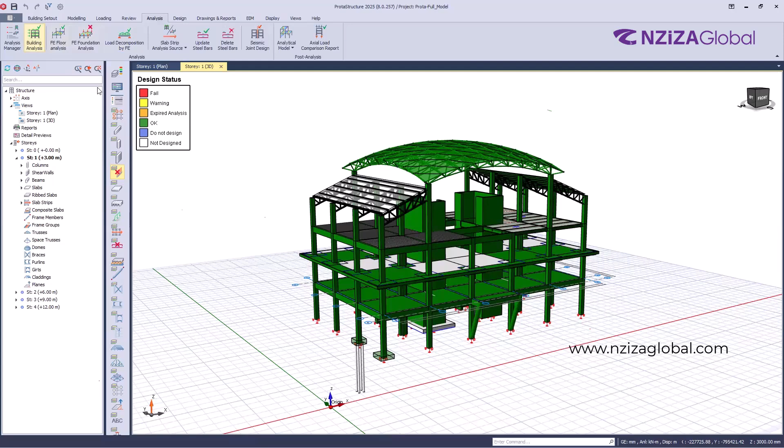Okay, so you can analyze an existing building. Maybe there is a building you want to do some modification on, or you want to change the use of the building, so it can be performed here. So you will have the results of the existing building, and you can compare them with the results of the proposed one. So it is feasible in Prota. Okay, that one is answered.